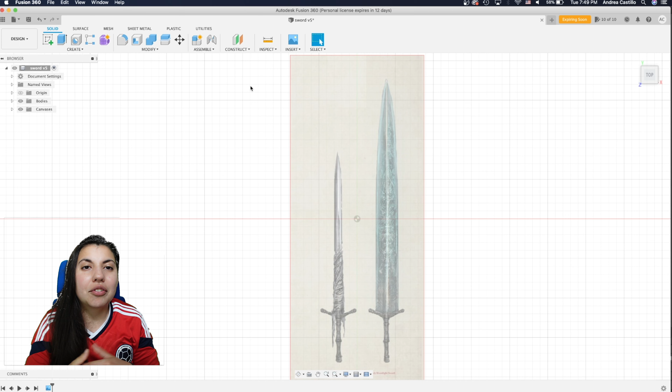so let us begin. So we're going to start first with the sketch of the sword outline. So we're going to start with the center part, then we're going to do perpendicular to the handles. So once we do that, the next step is to now do the spline part of the sword. And you can do however you want to do the spline.

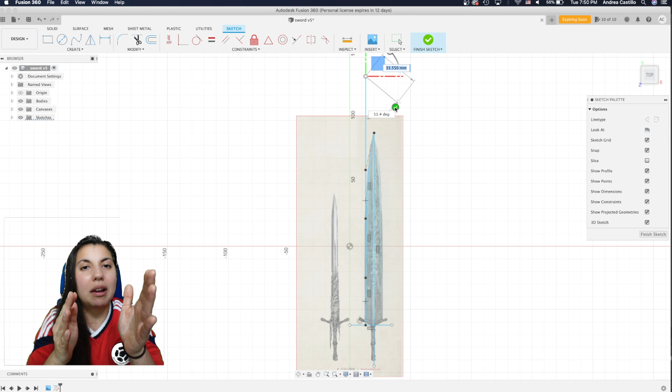But after you do that, the next step is to do a line that's on the edge of the spline, and we're going to use this line as a point of reference for creating a plane at an angle. So it could be a construct or a construction line, I believe that's what it's called. And once that's done, we're going to extrude from the sketch we've just created to create our sword. Now I know it doesn't look like a sword yet because we're going to carve out our sword.

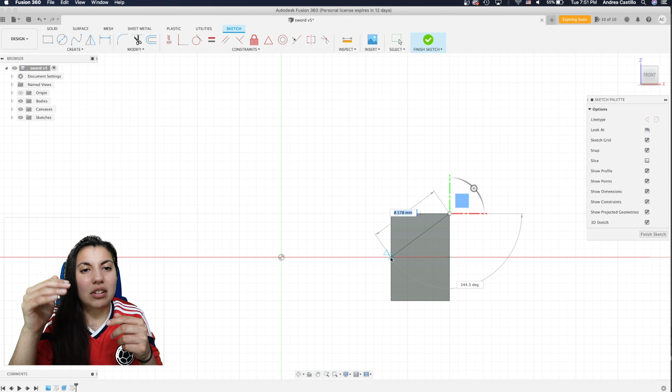So we're going to rotate the sword, and from the bottom we're going to sketch a line, like a triangle line, whatever you call that line, then another line that reaches out like this, and the angle between those two lines will be the angle we use when we create our plane at an angle. Now we also use this center line as a mirroring plane to make sure our lines are symmetrical.

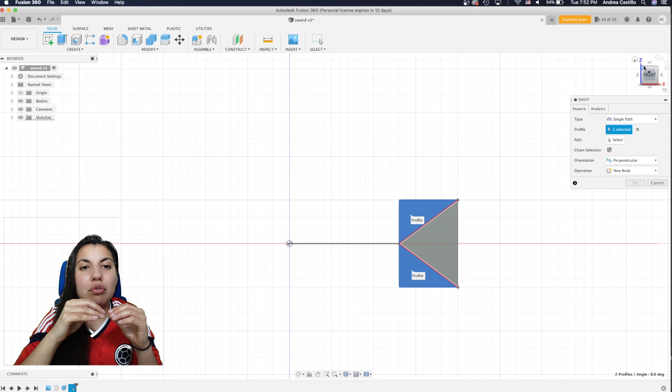Now with the two new shapes that we've created, we're going to sweep those, and we're going to use the spline as a point of reference to follow it, so that this will now carve out the sword we've just created, so it will have a perfect, like, this type of shape. And that's the reason I didn't do the drafting tool, because it's like this perfectly. It's not like edged and then slightly straight at the end, whatever.

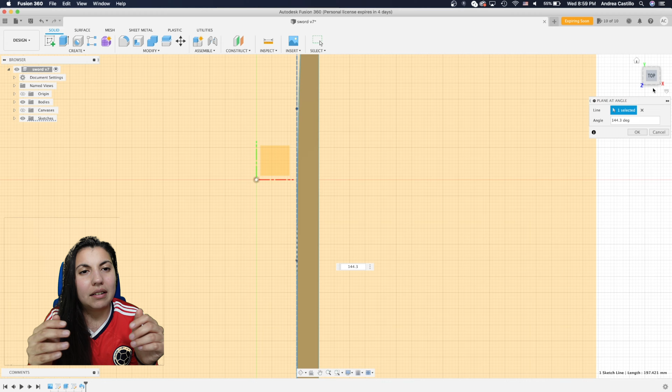So as you can see with the line, we've created our construct plane, and we use the same angle that we had that was in between this point of reference. Now that we have that, we're going to create a sketch on the construct plane, and we're going to project the body onto that sketch so we can hide the body.

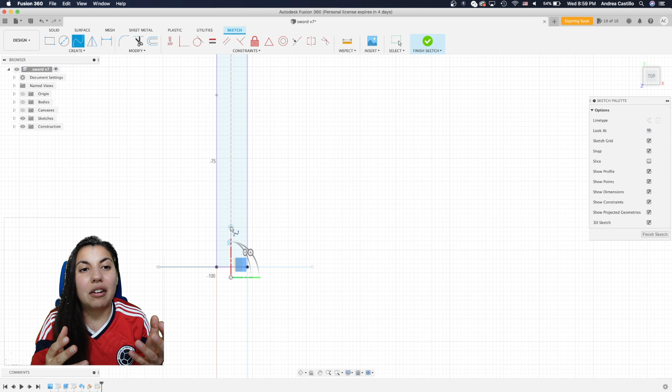And then after this, I took the liberty to just figure it out and hope for the best. And I created splines in pairs when I created the details on the sword. And you'll see why shortly I did that. So I'm not going to show you me creating all the splines. So here are all the splines, just a bunch of splines in pairs.

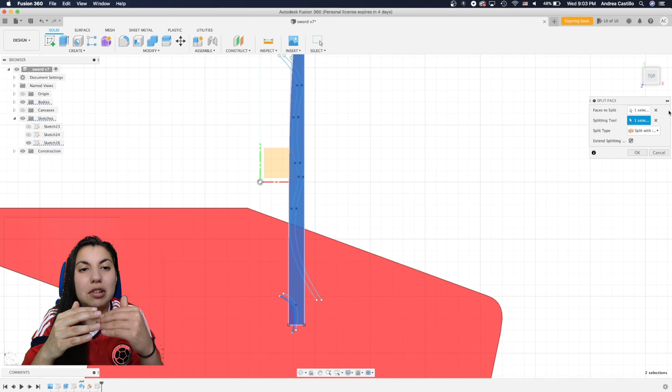And after that, I do a split face for every spline. So each spline will be splitting the face on the body. And voila, so you can see that. Now with that being done, the body has a bunch of faces now in it. So all those swim lanes, you can call that, is what I'll be using to push in like a form of a groove texture. So then the sword will have like a little groove in there.

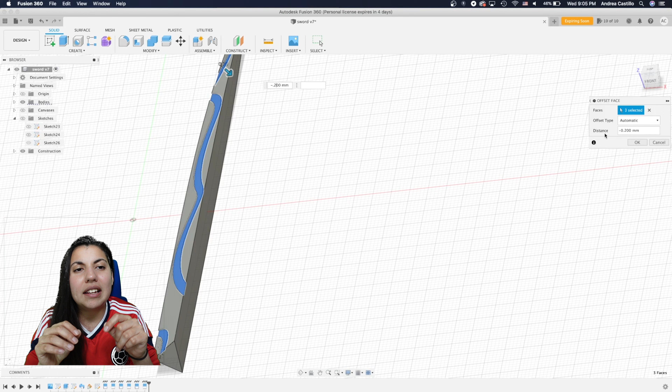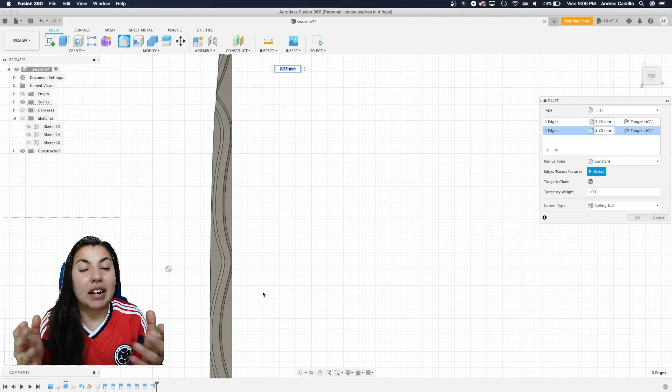And then once all those things are pushed in slightly, the next thing to do is to use the chamfer tool. But the one thing I noticed with the chamfer tool was that because the splines vary a lot, you can't use one chamfer for all. You might have to split the chamfers in between them and use that little plus sign when you do chamfer to do different chamfers, and then voila, it looks great. I love this. Now that that's done, my favorite tool, I like mirroring. It just saves a lot of time.

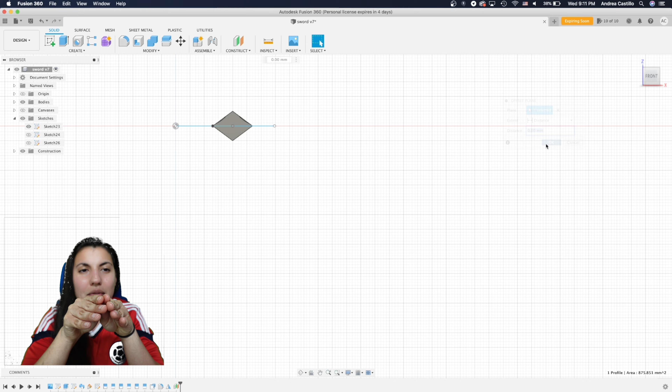So once this is done, you want to mirror the front sword, well, the left sword to the right to create the front of the sword. And then once you have the front of the sword done, you're gonna have to split the body, and you're gonna have to take that front sword, join those bodies if they're not joined already, and then mirror them to the back. So then you have a full complete sword done.

If you want, you can do different textures, and you don't have to do this, and you can just repeat the process but do different designs, front, back, whatever you want to do. But this is how I did a quick roundabout way of creating the sword. Now the next step is to cut out the sword and prepare for the handles.

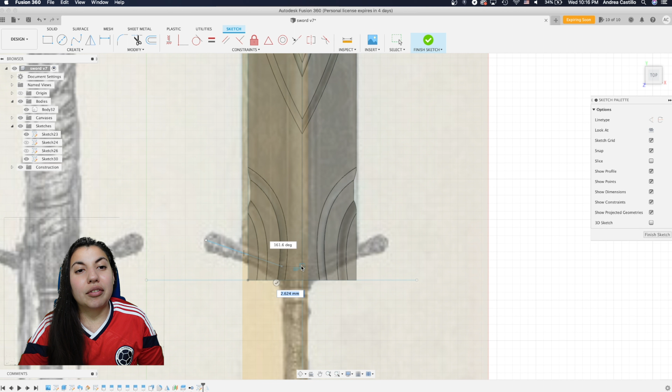So for this step, I drew lines and I couldn't get them to connect. I made them symmetrical by using the center line as a point of reference to mirror the line. So I just split the body one line by line. But then another issue was I had to do this before I did the last mirroring because I ran into a problem.

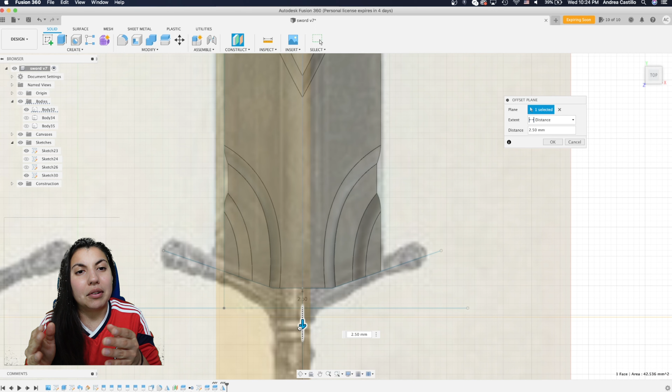I don't know what it was, but it wouldn't work unless I did it before the last mirror. But after that, nonsense. So you do a construct plane, you do an offset, and then we're going to project all our lines onto the construct plane. I do this because I'm going to take that bottom design and push it up, extrude it up, if you want to say the correct word.

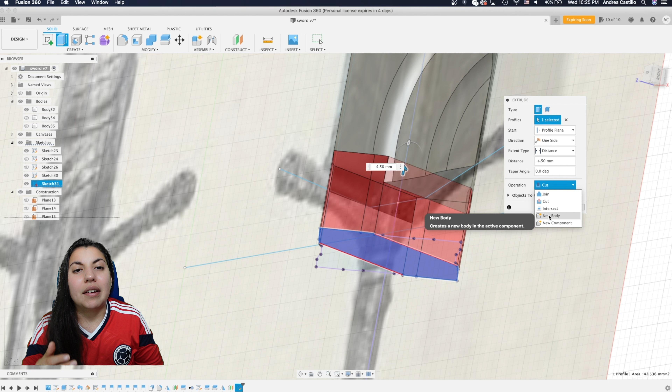Extrude it up, and I do a taper because I noticed the handle is like slightly offset, here's a handle and here's a sword. I don't know if that explains it right, but there's a slight offset, and this is how I was able to create that offset.

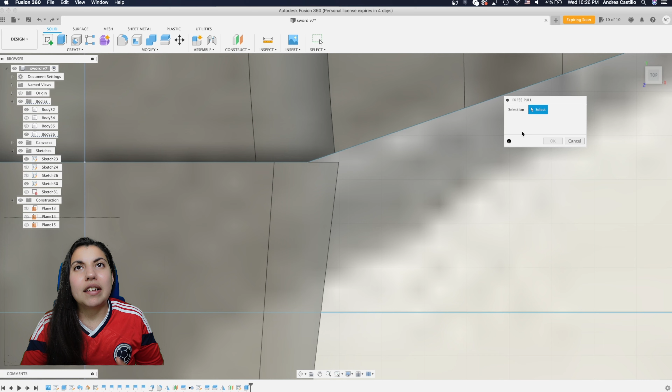And then the next thing is, once that offset is completed, if you look, because it's tapered, the left and right side are pushed off too much. So I had to visually do my best and see if I could get them to be pushed up. And so I just pressed them up a little bit so I could be angled a bit better with my eyes.

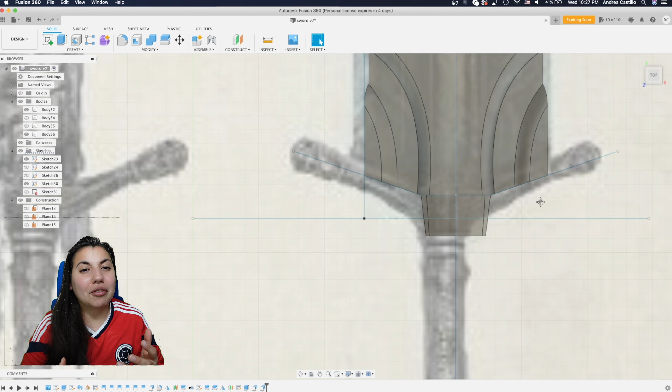And I did what I do to one side, you got to do the other. I didn't really mirror this one, but sometimes you gotta do the hard work. Now after that, this one I'm still not sure why it wasn't working in the beginning, but I was using the sweep tool and I used the face that we just pushed in to create the sweep of the handle.

And so it kept cutting and it was being weird and I got these errors, but then when I moved the left side that was closer to the center, it started to work and that's how I got it working. And I was like, ooh, that looks nice, but you notice it's really wide.

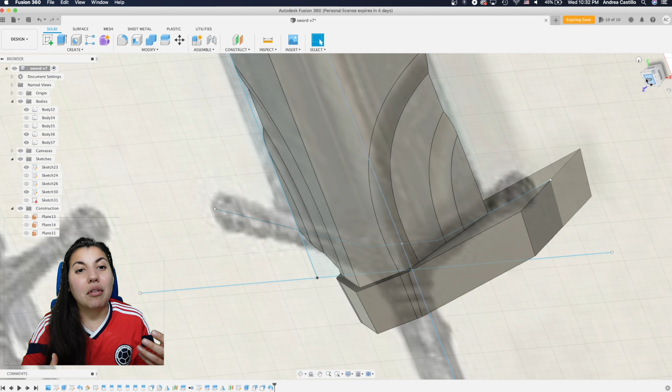So after I did that, I just used the drafting tool and I used the center point that was the inner part. And then I did that. And that is what allowed me to then make it look like that.

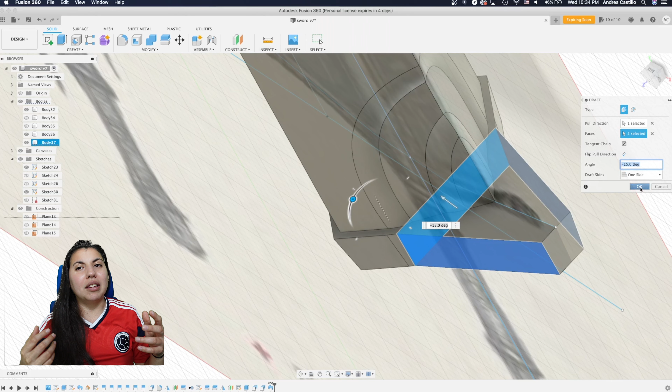And then I have the habit of just rotating things and checking things at all angles because I just want to make sure nothing slipped. Because sometimes when I do things and they're at different angles, I notice something wrong with them. So now that that's done, you could mirror this right away, but there's no reason to rush that.

So I'm now going to start doing the handle. So the handle has these two cylinder things. So I do a construct. I like to do construct plane just for safety. And then I do a circle.

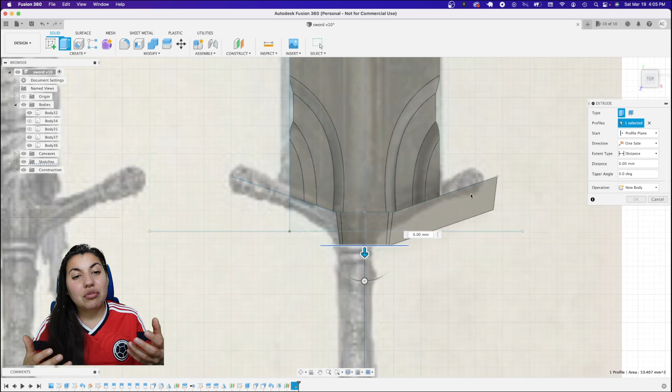And I'm going to extrude this circle. And then once I extrude this circle, I'm going to extrude it again. But when I extrude it again, I want to make sure you select new bodies because then I can do fillets on the circle. If you don't do new body, you're just going to have a giant cylinder, and it's not going to look that good because it's a giant cylinder.

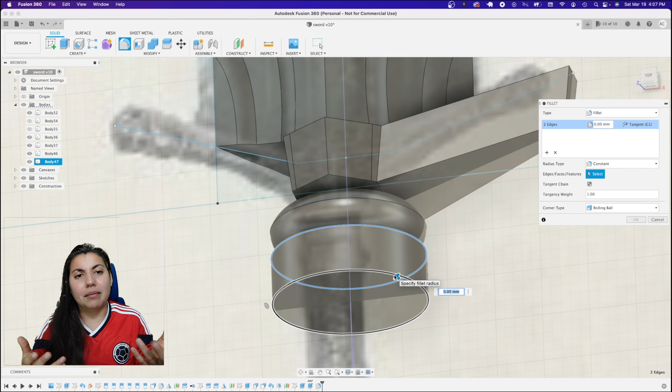You want them divided. I mean, you could do a giant cylinder, then split body mid-plane later on. Sure, whatever makes it easier. I just made them like this, and then I do a fillet. And after that, I'm extruding out of the circle I just created.

And looking back, I think I should have done a revolve because sword handles don't look good when they're straight like that. I don't know. So either way, go back to my construct plane lifestyle.

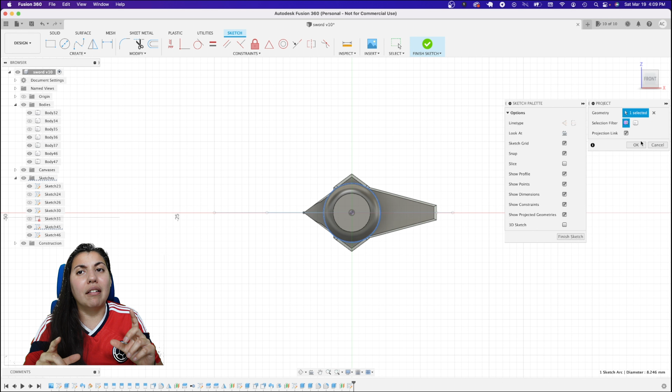And then I'm projecting the circle that we originally did in the beginning of the handle. So I'm always going to keep projecting that circle over and over and creating these cylinders as a point of reference just to make it easier. So if I ever adjust that first circle, I can just go to the construct plane, and they should technically automatically adjust because they're just being projected from one to another.

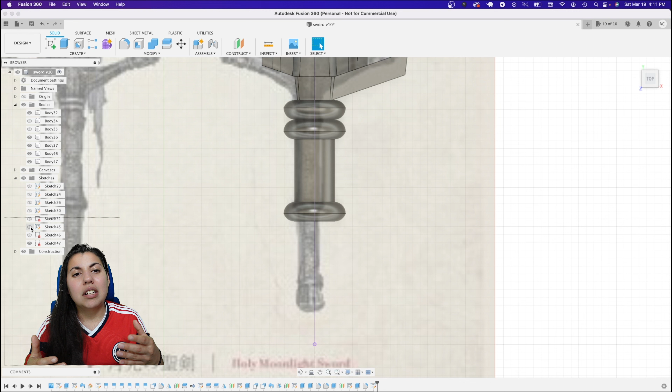So here I'm using the drafting to create this part of the cylinder. And I projected that inner line to use as a point of reference. So that's when I'm using the axis. When you draft something, you click an axis. And then I use the intersection tool to find where the plane intersects with that circle that is the opposite perpendicular of the sketch, if that makes any sense.

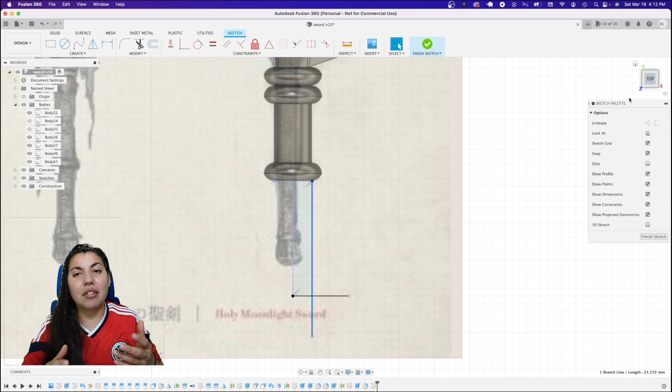So after I do that, I know this is the reason I'm revolving this one is because the inner part, I'm trying to make it a bit more round.

So you can do a spline or use the arc tool to create the curvature if you want. I also create a line as a point of reference to make sure something's straight. But that was just me making sure I can visually see the curve. Nothing serious, and then you hit revolve.

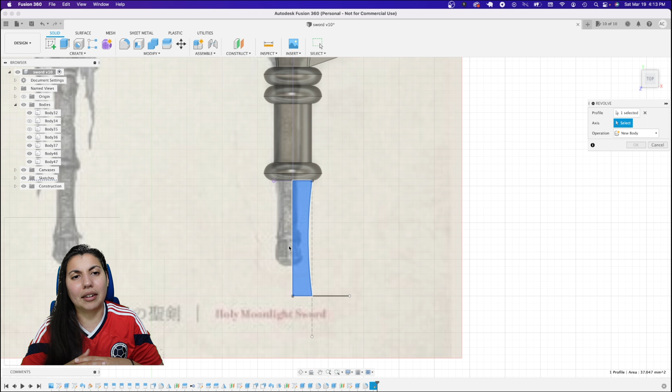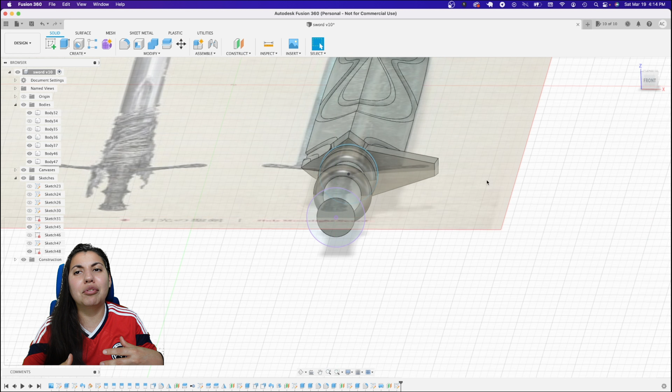Make sure you check the polygon you just created, the 2D one, and the center line as a point of axis. Then we're doing the same thing we did before. Here I turn sketches off just so I can make sure I'm looking at the correct sketch. That's just me, nothing too crazy. But I'm still doing the same thing, going back, projecting the original circle, and then just extruding it to make sure it matches the rest of the ones.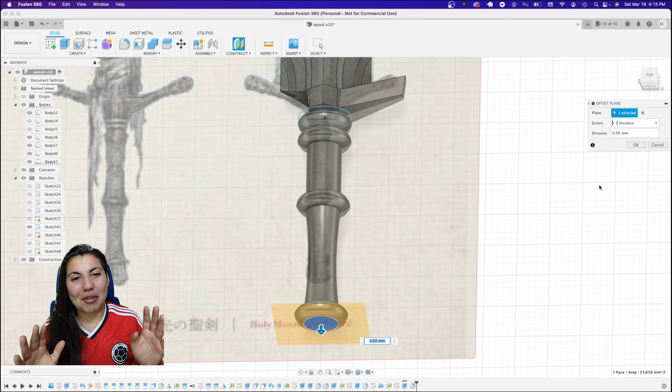And I do know the handle does not match the photo at all. You know when you get caught up and don't realize, oh man, this doesn't match. This one I was like, oh man, this handle does not match, and I was like, did I mess up the photo? But no worries, I'm going to go back and fix it eventually, which should be now, hopefully.

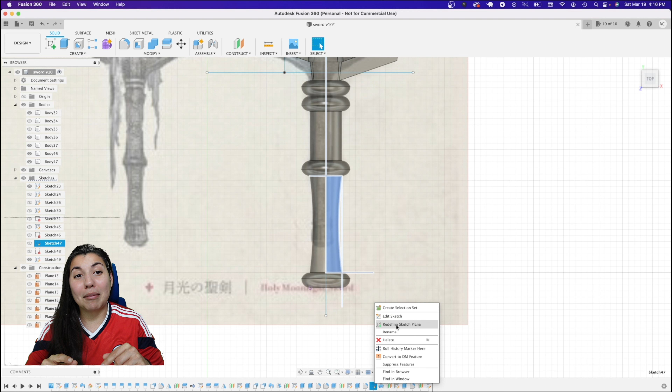I think, is this now when I realize it's wrong? Because right now I'm trying to do the rest of the handle, which is the intersection of the bottom piece. Oh, so yeah, it is. This is where I'm like, oh, this is way too big. So that's where I cut, where I drafted.

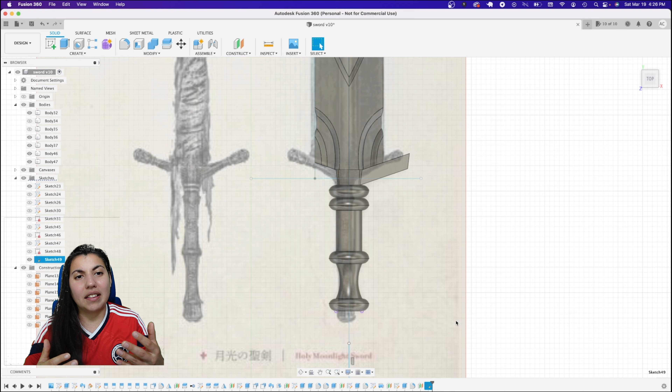Well, I didn't cut, I just drew a line and increased the line. Then I'm probably going to redo the arc and redo the spline, but it's the same concept, just shrinking it. So, because I did a construct plane, I can just reselect the plane of where the construct was selected, and everything that I drew will readjust, which is cool.

So now we're back to creating the last part. It was basically the same thing as how we did the other handle. The main thing with the drafting tools, you always got to remember to use an intersecting tool when you're trying to make sure things are lined up.

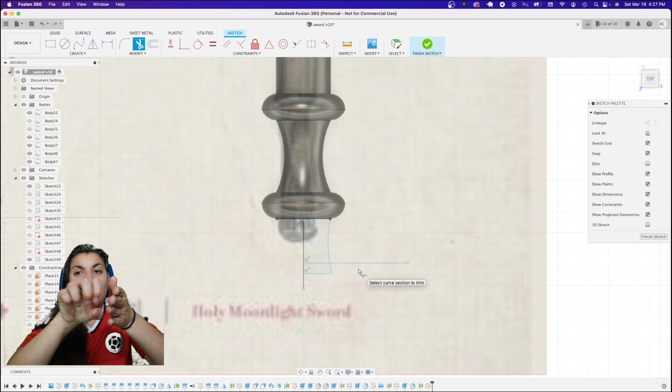And what I mean by that is, for example, let's say here's the handle, and this is where it's going to continue drafting, or this is where you would grab the handle in real life. When I have a plane here that I'm drawing on, and if I do the intersection tool, the plane will tell me where this intersects with this item that's here.

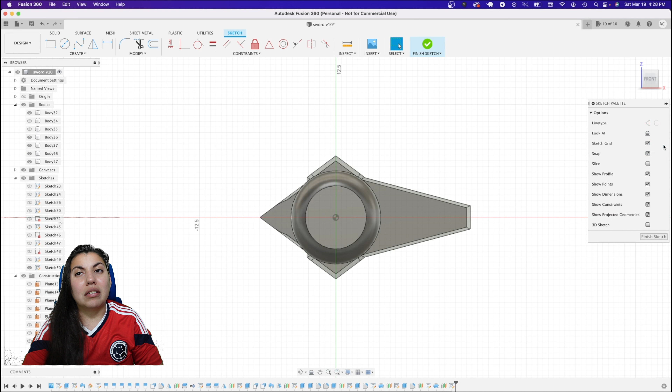So that's why I make sure the lines I'm creating on this plane where I'm going to revolve lines up with the handle that's already there. So that's the most important thing. Intersection and projection are very, I like them a lot. Maybe as much as mirroring.

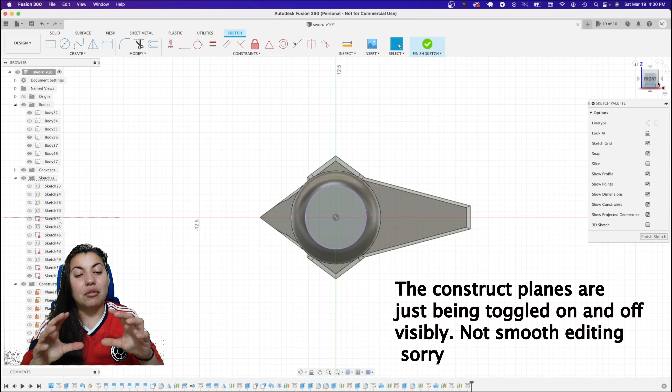So here I'm doing the very end of the sword, which looks kind of like a little round thing on the bottom, like a little nubby thing. What I'm planning on doing is a lofting. With that, I'm going to create an outer circle, which you've seen me do right now, and then I'm going to loft that to a point.

You don't have to do a point. I created a circle because a circle automatically creates a point, which is why I did the circle on the offset. And then I just make sure it's not a sharp, pointy loft. And then, voila, that looks nice.

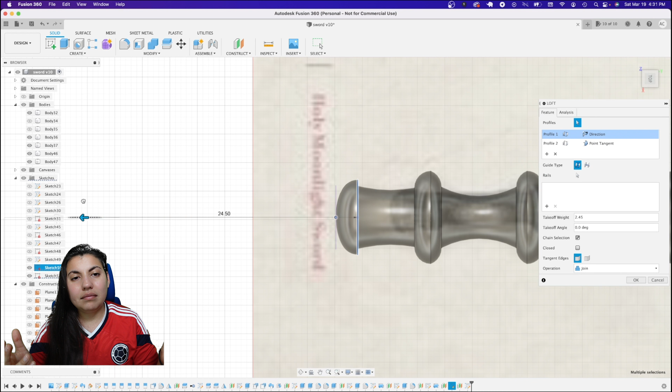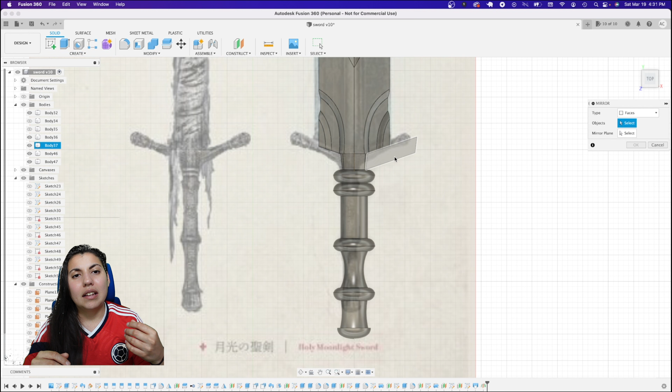And here is where I use the mid plane, so I can find the mid plane between the top handle, and I can just mirror the top handle's little handle sections from one side to the other, which is nice. And then something happened with my editing, and so basically I adjusted the size of what I extruded. Let me pause, sorry. I adjusted the size of what I extruded, and I lost...

I don't know, something happened, I don't know what to say. Those circles were all adjusted to be maybe like 1.5 or 0.5 something millimeters, and then I readjusted the fillet.

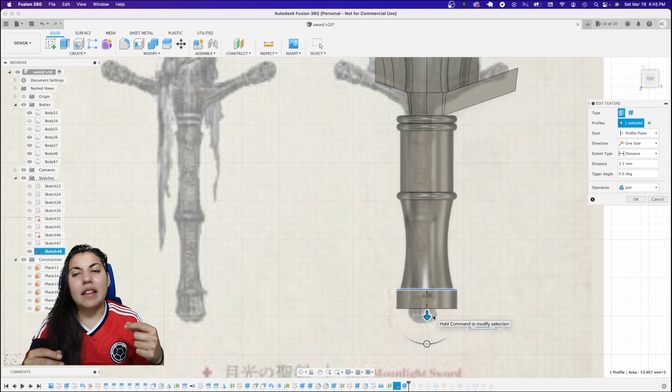And then when I did that, everything stayed the same because I had the construct line set up, but this one part got messed up. So I'm just redoing this part that got messed up from me adjusting the length of the cylinders I made. This is like the actual size of me adjusting the cylinder, because this one came out good. Well, this one didn't get messed up, so I had to redo this.

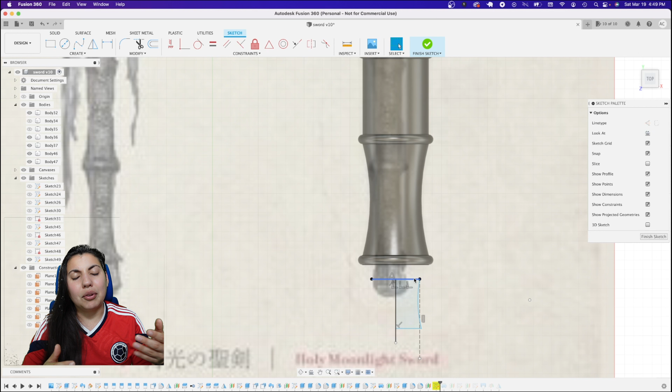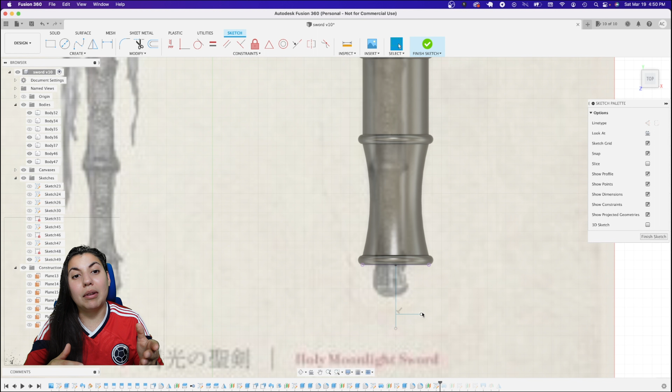This is basically the size I had, then I created the fillet on it so it can be readjusted. You can see here I use the intersect tool for that part of the handle, and I use a constrain with what I already have to make sure it's going to connect, because the constrain tool will just make things join, which is neat. And the arc tool to recreate the little nub end section that was created.

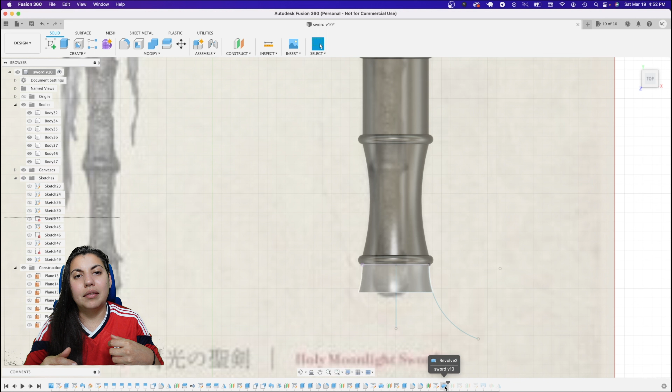So I'm going to extend it because it's not touching. I did this part a little bit differently, and I got to just revolve it, because that's already done. So I'm just going back right now and fixing the issues from me fixing things.

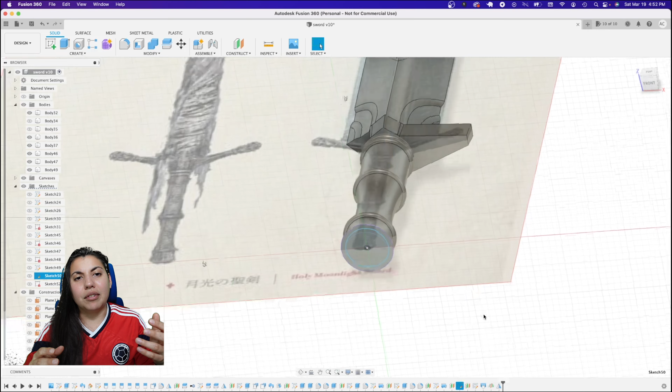Since I did a construct plane, this is why I like doing it - when you change something, you can just go back and select the plane that's related to the new part of where the construct plane is going to be. It makes it easier. And here I notice with all these changes, the outer circle I did is not big enough for the lofting because it looks weird. So I just have to go back and create a larger offset of the circle and then redo the lofting.

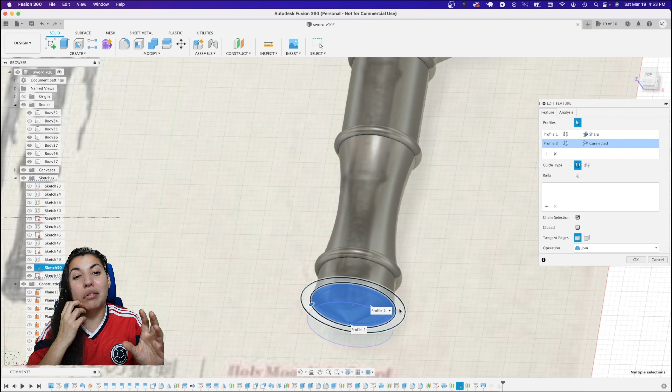But sometimes when I redo the lofting, I mess up, because instead of adding it as the current face, it adds it like it's a new face it's lofting to. So it gets weird. So that's just me redoing all this stuff. I thought about editing this out, but I think it's good for people to see the process and when someone goes back and fixes something.

And then I added the chamfer tool at the end because chamfer tools look nice.

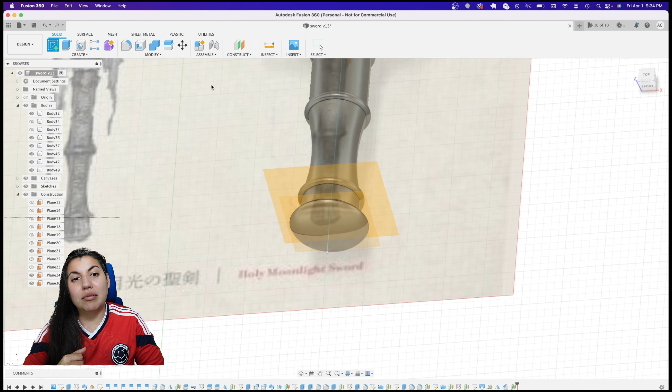Now, for this one, I'm creating a final detail in the handle, and I use construct planes, using the previous construct plane. There's two ways you could probably do this. I am doing circles - you don't have to do a circle, I just thought a circle was easiest, you can do any odd shape you want. So I do a circle on one, and then I project that circle onto the other construct plane.

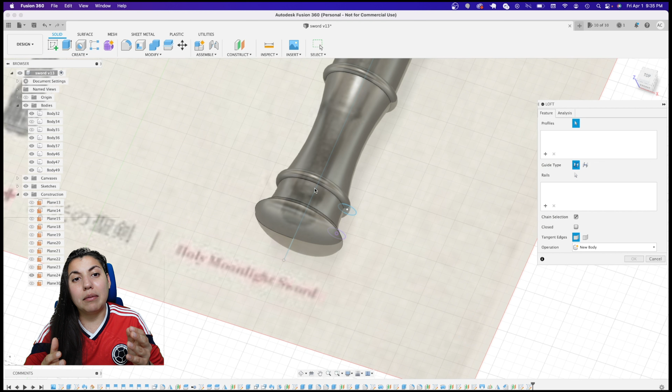So you can either just loft it and not have it be rails - they just loft one another, and I'm going to do cut. You can see it's going to make an indent, and I think that's a nice, cool looking feature which I've seen how people do this on handles.

Now that feature is done, you can just do a circular pattern and find the circle part of the cylinder, select it as your axis, and type the number of times you want it. Make sure you do the feature when you're doing this - you want to duplicate this feature on the handle, and it looks really nice.

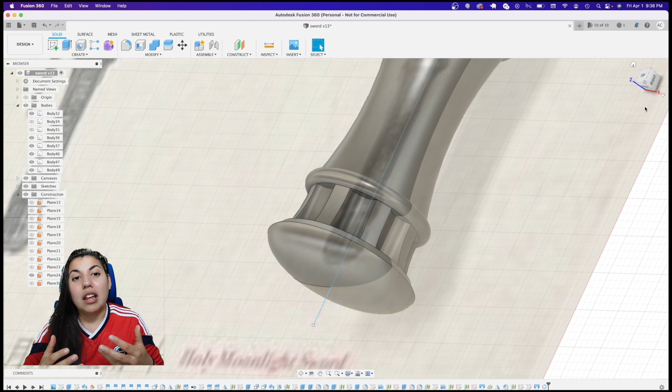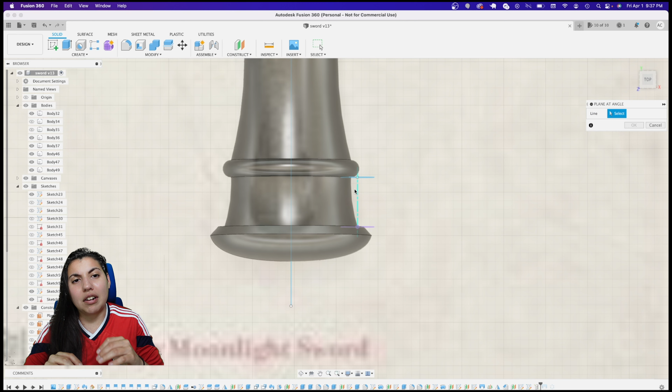So this is just doing it the easier route. But if you want the lofting to have more of a direction per se, what you could do to make sure you're sketching in the correct direction is you can do axes through 2 points - since a circle has 2 points, I create an axis through 2 points, and then I create a construct plane on that line where you can do construct at an angle. And on that construct plane, I create a sketch, and then I draw whatever I want, making sure the circles are touching one another.

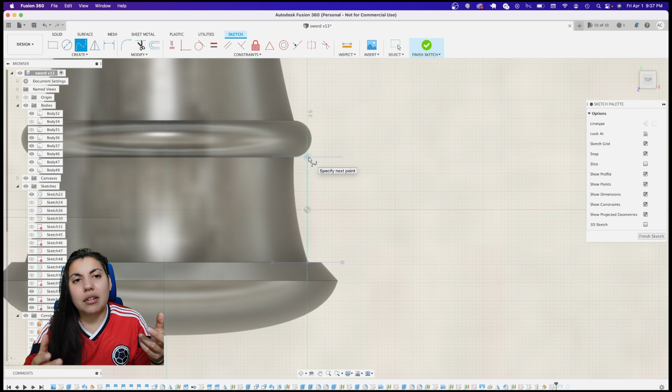So, draw a spline, a deep curve, a light curve - as you can see what I'm doing, I'm just creating a gentle curve, something basic. I think this is a cool way to edit cylindrical objects or just anything in general. I think this is a really cool thing.

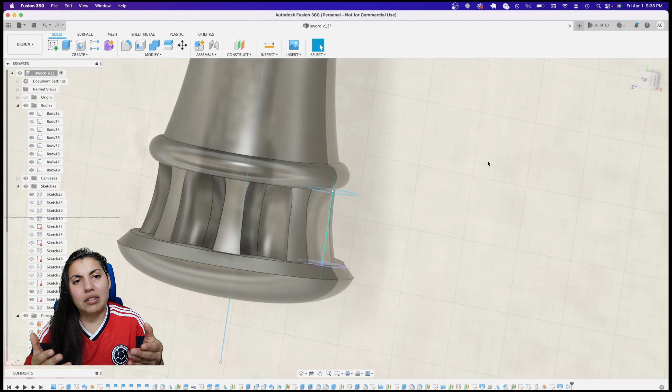And voila, see, so when I lofted it, I made sure it followed the new line I created. You can see it looks slightly different, so if you want a more specific thing. And if you change one - that's when I forgot, like oh, I projected it - so when I changed the top one, I changed the bottom one too, and I didn't even remember.

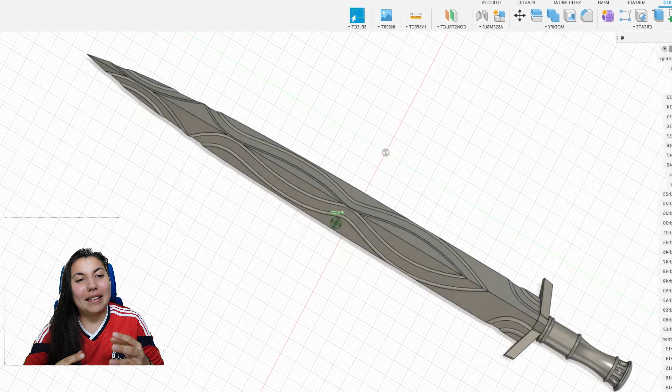But yeah, so this is how the sword looks overall. I'll be honest, I'm not exactly thrilled with it, but I do plan on going back and just fixing those handles because it's bothering me so much.